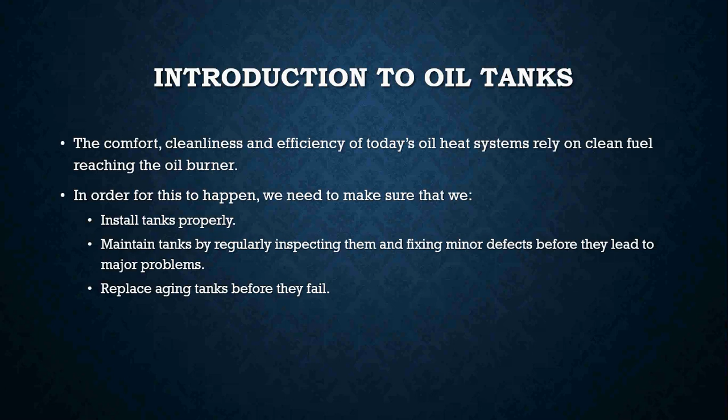We should be definitely looking at the overall condition of the tanks, and obviously we're going to want to replace them if they are old, and usually with well-maintained tanks, they'll last probably longer than the furnace and burner itself. It just all depends on where they're located and the overall maintenance that's been done with them.

Okay, when we are installing tanks, though, we really need to make sure that we follow code. Different towns and cities have their own codes that need to be followed, but they cannot be any less than the International Code Council or NFPA. So we have to always make sure that we're following the set standards and codes for that particular part of the country, state, wherever it is that you are.

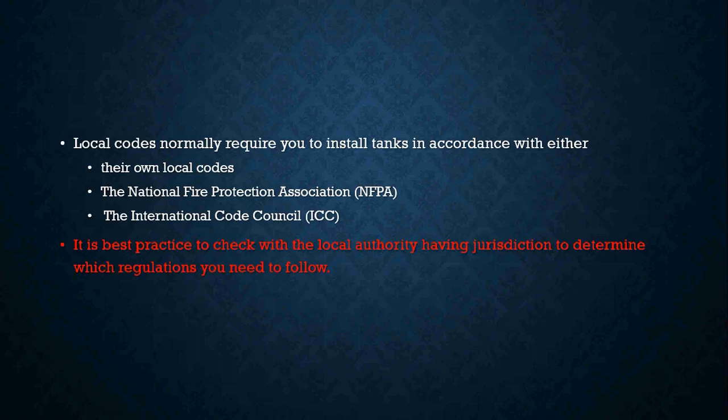So it's always really important to check with your local authorities having jurisdiction to determine which regulations that you actually need to follow to properly install an oil tank.

So why do oil tanks really fail? That's always a good question. In fact, some people will maybe even ask you that question. Well, what the heck, why does my oil tank need to be replaced, or why has it failed? Well, the big reason is because of corrosion. Corrosion is a big part of how an oil tank is going to fail.

You have external corrosion, and that is usually caused by electrical activity that occurs between two different parts of the tank, and that's usually between the tank and its piping or between the tank and other metals that are in the area. Okay, so usually the overall area of the tank is what's going to cause that external corrosion. The tank and the piping, well, we deal with copper oil lines and steel tanks. So with those two dissimilar metals, over time, you can start developing external corrosion and possible leaks. If the oil tank is in contact with another dissimilar metal, again, it can create some sort of external corrosion.

Now, does that happen overnight? No, I mean, it could literally take years before this type of corrosion can take place. So for external corrosion to occur, there needs to be an anode, or something that is giving up electrons, okay, such as the tank. You have a cathode, which we use to accept the electrical flow, and that's going to be your piping or metals in the ground or whatever it is that's there. And then you'll have an electrolyte, which is something for the electricity to travel through.

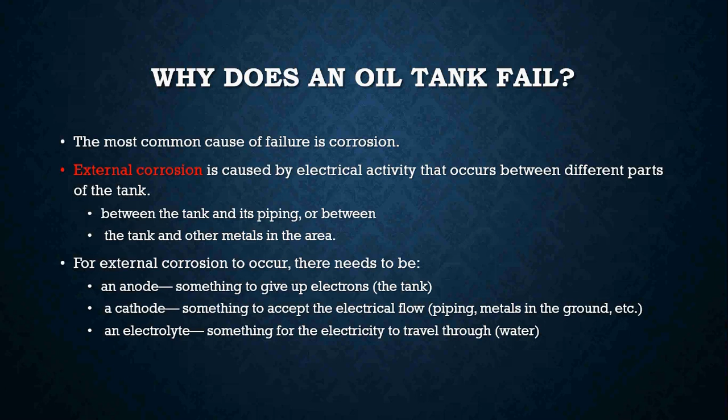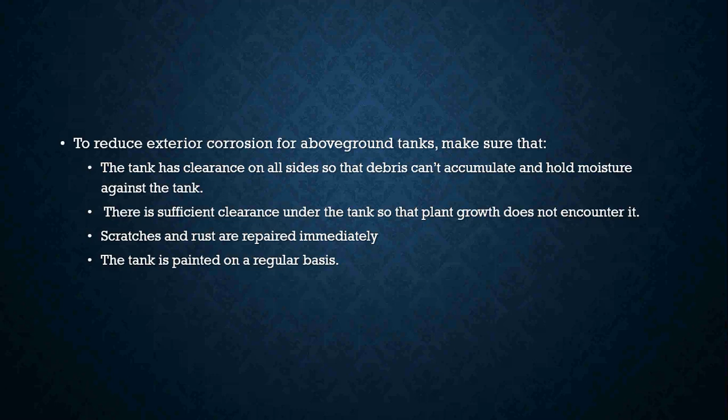And that is usually going to be water. To reduce that external corrosion, especially for above ground tanks, we have to make sure that the tank has clearance on all sides so that debris can't accumulate and hold moisture against the tank. We have to make sure that there is sufficient clearance under the tank so that plant growth does not encounter it. We also have to make sure that any scratches or rust marks are repaired immediately, and make sure that the tank is painted on a regular basis.

So internal corrosion is another way that a tank can deteriorate, and that is usually caused by sludge produced by bacteria. Okay, for internal corrosion to occur, you need to have water and bacteria on the bottom of the tank. So that bacteria, which lives at that oil and water line, which is usually right around here, okay, it's going to develop bacteria. That bacteria is going to develop into sludge, and that's going to settle at the bottom of the tank. And that is what's going to eat the oil and create a substance that, when mixed with water, creates an acid. And that's going to actually corrode the metal of the tank.

So when we are dealing with oil tanks, whether they're in ground or above ground, it is really good practice to actually dip the tank, where you take a measuring stick and put a special water-finding paste on that stick, and dip the tank. If there's any water accumulation at the bottom of the tank, that paste is going to change color, and we can measure how much water is in the tank.

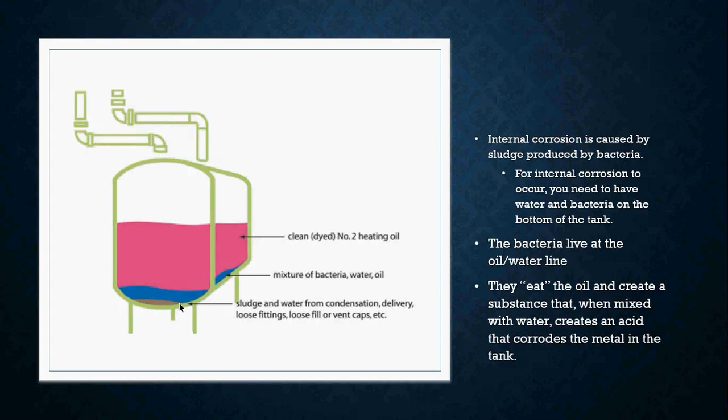We want to always try to keep water in the tank to a minimum. We don't really want too much of it in there because it's going to pollute. The best way to prevent internal corrosion is to eliminate the water at the bottom of the tank. You must also determine how the water got into the tank and take corrective steps to prevent water from building up again.

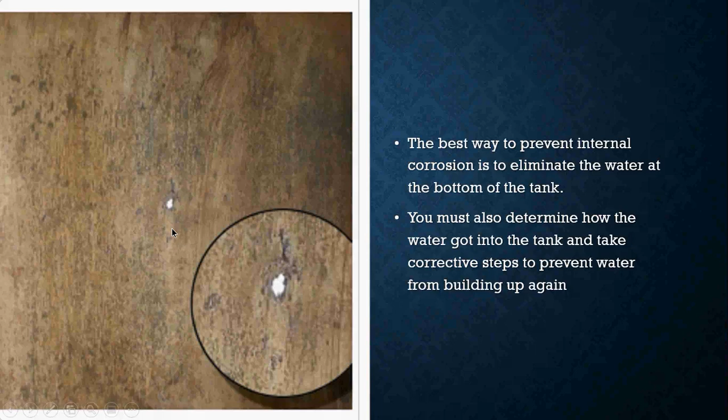So what you're seeing here are actually signs of corrosion on the side of an oil tank, these little white blotches. When you're looking at the external part of a tank, you're going to want to investigate to see if you have any signs of stuff like this.

You're also going to want to look and see if you have what we call bug tracks. These are signs of bacteria eating its way through an oil tank. If you see something like this, this tank needs to be replaced relatively fast, because these are actual weak spots in the metal, and eventually that tank will rupture, and you're going to have a really big catastrophe in that basement or wherever the oil tank is located.

The common causes for water to get into a tank are condensation, broken tank gauges, especially if you have outdoor tanks, and loose or missing fill and vent caps on your outdoor pipes.

Some people like to take old sauce cans or soup cans and stick them over the pipes. Sometimes you're going to want to look underneath those cans, if they are there, to see whether or not the fill and vent caps are actually there.

Another cause is pumping oil from an old tank into a new tank. Remember, oil that's been sitting in a tank for a while is going to have impurities in it. So simply pumping it from an old tank to a new tank, you're going to put water in the new tank. Another cause is failing to drain the water from a tank before installation.

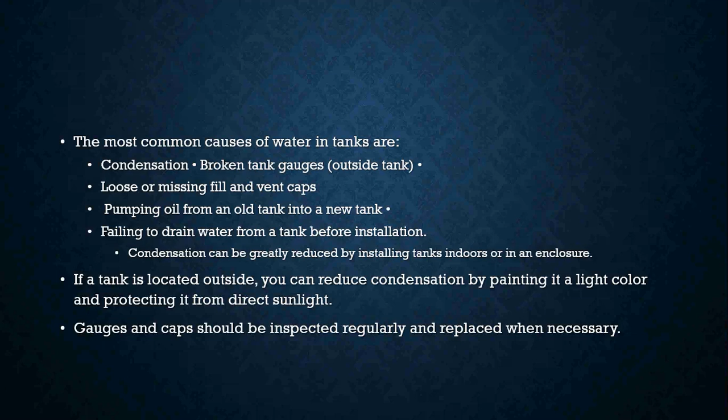Gauges and caps should always be inspected regularly and replaced when necessary. So when installing a tank, you've got to really make sure you know what you're doing from the first part.

You have to take into consideration the following questions: What size tank do we need to best suit the application we're dealing with? What's the best place to install it? Is it going to be in a basement, or outdoors? And if it's going to be outdoors, where can I put it so it may not be in direct sunlight 24 hours a day? What type of tank is going to be best to take care of the heating needs of the home?

When it comes to sizing, an oversized tank can cause service problems, such as poor fuel quality. Fuel oil has a shelf life and deteriorates over time, leading to corrosion. Large tanks usually build up more water from condensation. The bigger the tank, the more surface area you've got, and the more surface area, the greater the chance of developing corrosion.

So in general, the right size tank is one that holds roughly about a third of the customer's annual consumption. For example, if we have a customer that uses roughly 900 gallons of oil a year, a 275 or 330 gallon oil tank would be sufficient for that type of application.

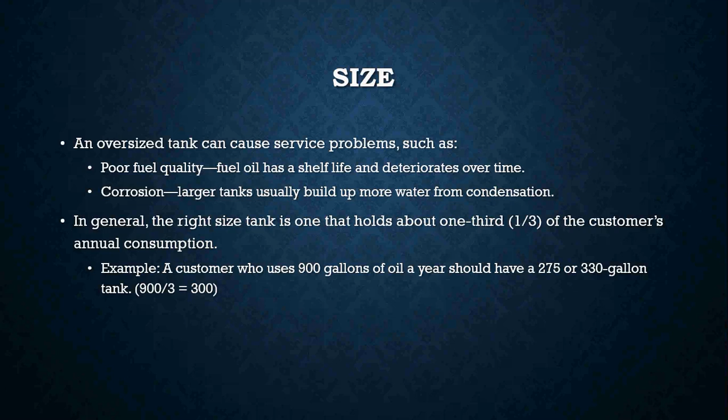How do we get to that number? Well, we take 900 and divide it by 3, which is 1/3, and that comes up to about 300 gallons. So roughly a 275 or a 330 gallon tank would be sufficient for that particular home or business or whatever it is that we're dealing with.

The location of your tank is also really, really important. Where is it going to be? Is it inside a building? Like I said, usually a basement, maybe a utility room, in a garage, wherever it's going to be. If it's going to be outdoors, is it going to be above ground or underground?

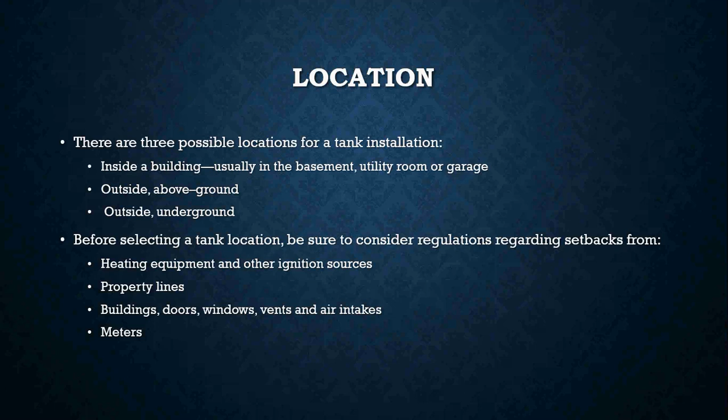Before selecting a tank, be sure to consider regulations regarding the setbacks for those tanks. How far away does the oil tank need to be from heating equipment or an ignition source? How far away does it need to be if it's outside from a property line, from other buildings, doors, windows? We have to make sure we're following those local codes. Any sort of meters that may be around, say maybe there might be a gas meter in a condo complex or something like that - where does that oil tank need to be?

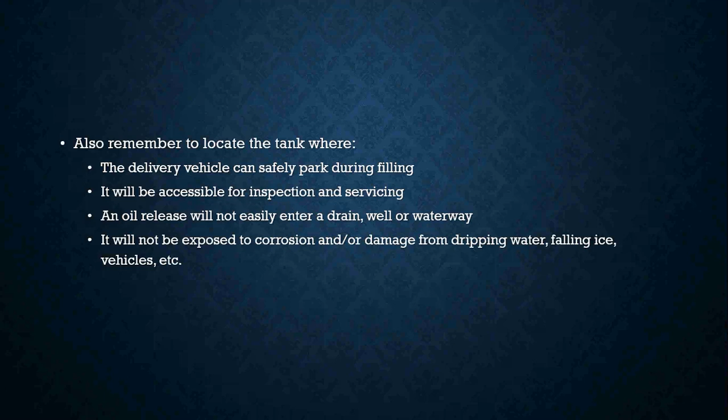Also remember to locate the tank where the delivery vehicle can safely park during filling. We want to make sure the oil delivery guy has a good line of sight for his truck to where he's filling. It will be accessible for inspection and servicing. Any oil release will not easily enter a drain, well, or waterway - those are also really important things to look at when picking a tank location. Also, will it not be exposed to corrosion or damage from dripping water, falling ice, vehicles, whatever. Inside tanks, above ground tanks, indoor tanks should be installed whenever possible.

In fact, I think inside tanks is really probably the best way to go, if at all possible. These installations offer a number of advantages over outside tanks, including that the oil is usually warmer, which helps with viscosity issues, because when you're dealing with oil that is warmer, it's going to flow better, and it won't gel or have cold weather performance problems. There are fewer temperature changes, which means the oil will last longer, because remember, it does have a shelf life. So if oil is at a more relative temperature and doesn't have a massive fluctuation, it's going to last longer and you'll have fewer problems with it.

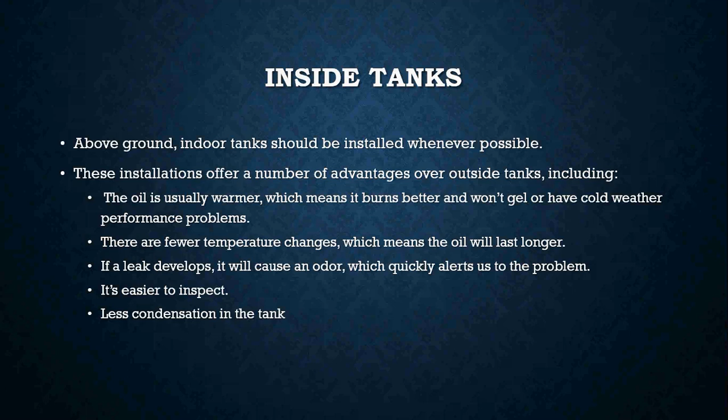If a leak does develop, it can cause an odor, which quickly alerts us to a problem. If it's underground, we don't necessarily find that problem until it's too late. It's easier to inspect because it's visible, and you have less condensation in the tank - again, because it's at a relatively constant temperature.

It's also important to follow codes and instructions regarding tanks that are indoors. Distance from the tank to a burner - they have to be at least 5 feet away from the burner. Your size and height of vent pipes is also important - you have to follow your local code for the minimum size for your vent and your fill. Your size for fill pipes, fusible valves at the tank, fusible valves at the burner.

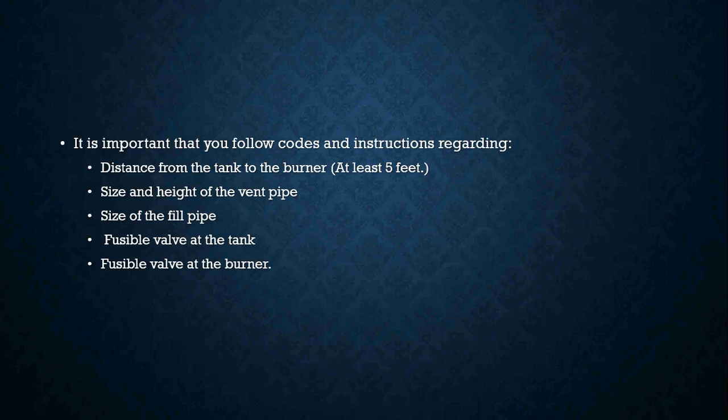You have to make sure all these components are there when installing an oil tank. We have to have some way to shut the oil off in the event of an emergency, and obviously when servicing. The fill and vent lines must be pitched towards the tank. All tanks should have a vent alarm and a tank gauge. All systems should have an oil filter, which can be located at the tank, at the burner, or at both.

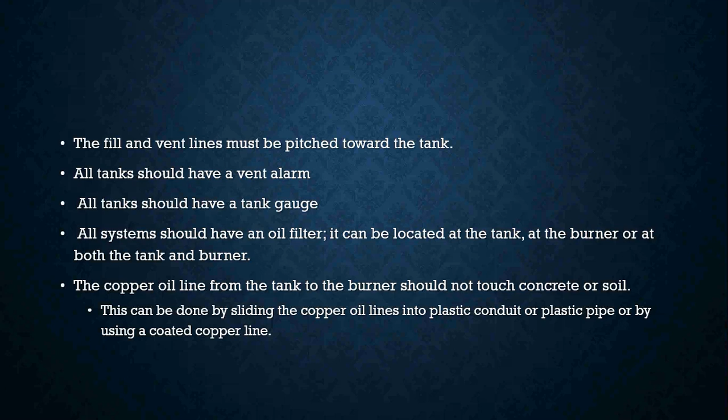The copper oil line from the tank to the burner should not touch concrete or soil, and this can be done by sliding the copper oil line into plastic conduit or pipe, or by using a coated copper line. So if you're dealing with tanks or oil lines that are going to be underground, it's good practice before they pour the concrete over it, that the oil line gets installed in a conduit or plastic tubing, so it does not come in contact with any foreign matter.

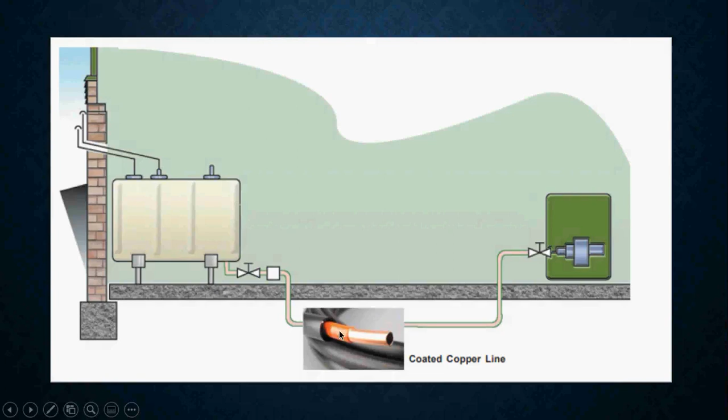Obviously, older homes didn't do this. If you go into a basement now, you could probably see that the oil line just kind of sticks into that concrete - that's just the way things were done back in the day. But newer installations, we now put them in a plastic sleeve or some protective enclosure when going through the ground. Or what we simply do is take those oil lines, abandon them, cut them at the floor, and run a brand new oil line along the floor using that nice protective coated copper oil line, so it doesn't corrode when it touches the concrete.

Outside oil tanks, above ground tanks that are outside, if there is no room for a tank inside the building, it must be installed outside. So it's a good idea to install the tank in a secondary containment type system, or in an enclosure that protects it from the elements.

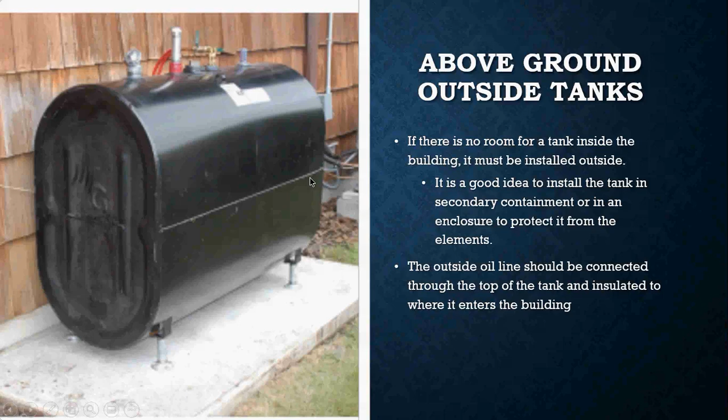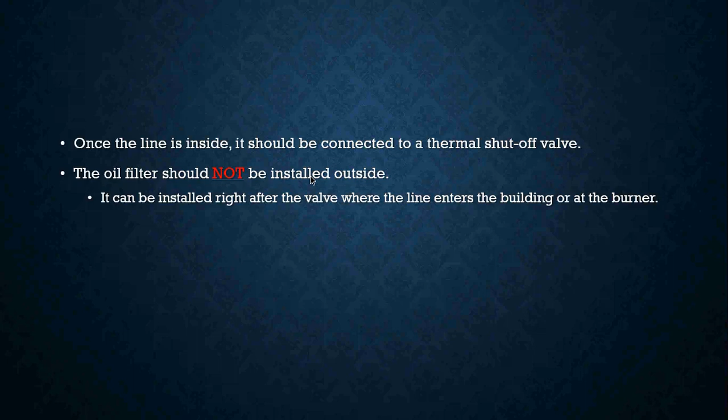Once the line is inside, then it should be connected to a thermal shut-off valve, such as a Firomatic valve. And the oil filter should not be installed outside. It can be installed right after the valve where the line enters the building or at the burner.

For underground tanks, they do have an environmental issue, especially if they start to corrode and break down and crack. All that oil that is inside the tank is now going to seep into the soil, and that creates environmental problems, environmental regulations, and insurance concerns. So underground tanks need to definitely be inspected a lot more frequently. And if there's any signs of deterioration, they should be removed from the ground, and that tank should be replaced to either an indoor area or above ground, as we were just previously mentioning.

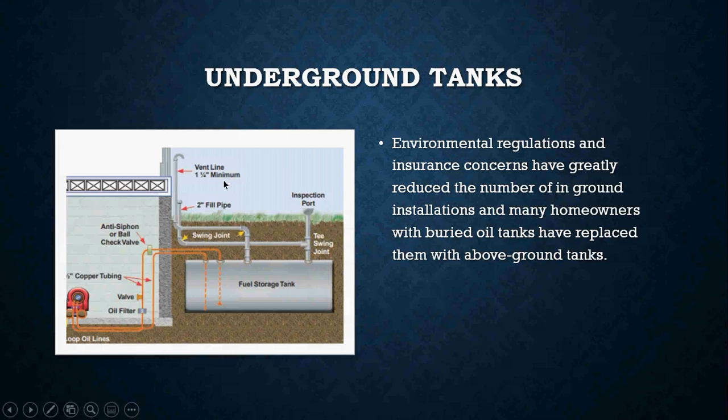When it comes to your vent and fill lines, we need to have a minimum of 1.25 inches for our vent lines and a minimum of 2 inches for our fills.

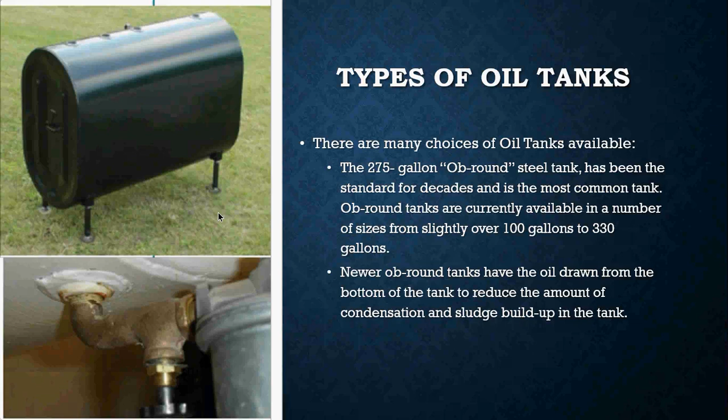Your types of oil tanks that are around, there's a whole bunch of them. The most common one is our 275-gallon ob-round steel tank, and these have been pretty much the standard for decades, and is the most common type of tank that we have. These types of tanks are currently available in a number of sizes, anywhere from 100 gallons to about 330 gallons. Newer ob-round tanks have the oil drawn from the bottom of the tank to reduce the amount of condensation and sludge that's built up in the tank.

You have your cylindrical types of tanks. These tanks are often found in mobile homes and in places where space considerations made it easier to install and service than having an ob-round tank. These types of tanks can range anywhere between 160 and 320 gallons.

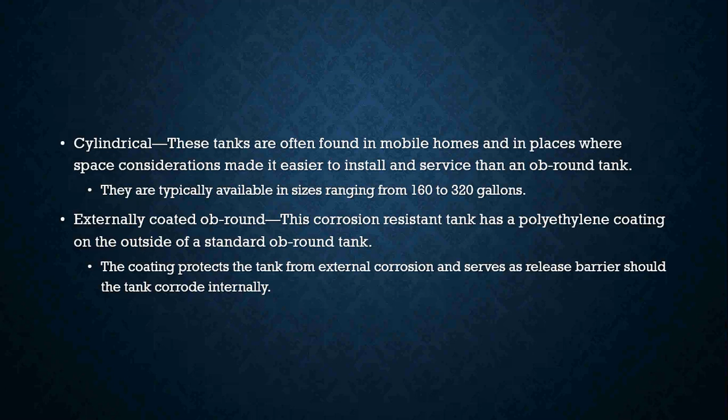You have your externally coated ob-round tanks. These are corrosion resistant tanks and have a polyethylene coating on the outside of a standard ob-round tank. The coating protects the tank from external corrosion and serves as a release barrier should the tank corrode internally.

You also have your fiberglass tanks. This corrosion-proof tank is available in both single and double wall models and can be anywhere between 240 and 300 gallons. The double wall unit is a tank within a tank. If the inner tank leaks, the outer tank prevents the release of the oil.

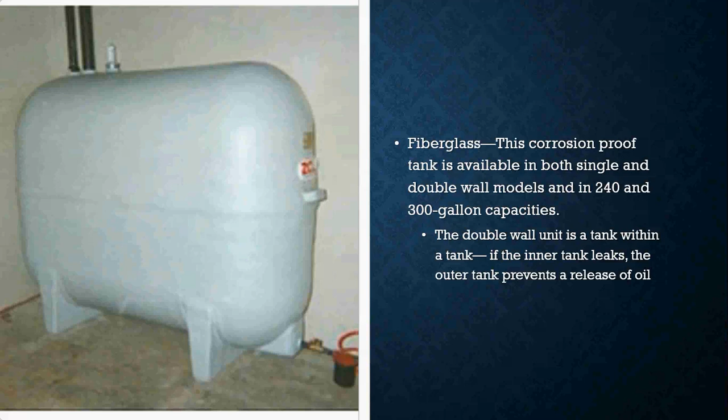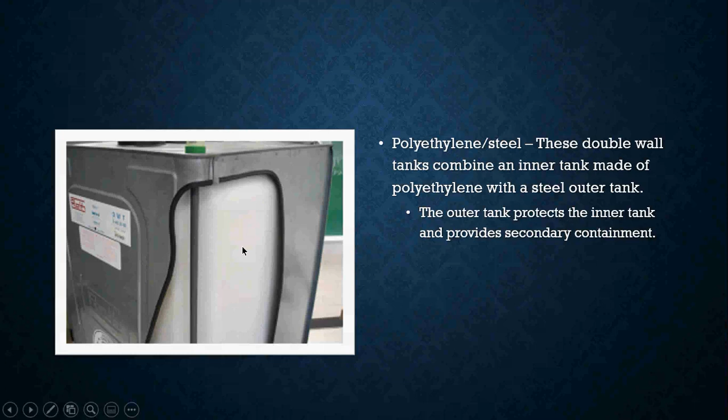You could also have your polyethylene steel tanks, or better known as your Roth tanks. These are also double wall tanks, and they combine an inner tank made of polyethylene with a steel outer tank. The outer tank protects the inner tank and provides secondary containment in the event that the plastic actually cracks.

Your underground tanks can also be your steel or STI-P3s. These tanks combine the strength of steel with a factory installed corrosion protection system. These types of tanks have a protective coating over the steel that prevents external corrosion. It has a sacrificial anode that protects the steel. It also has nylon insulation bushings that electrically isolate the tank from the pipe fill, vent pipe, oil lines, and the other attached piping.

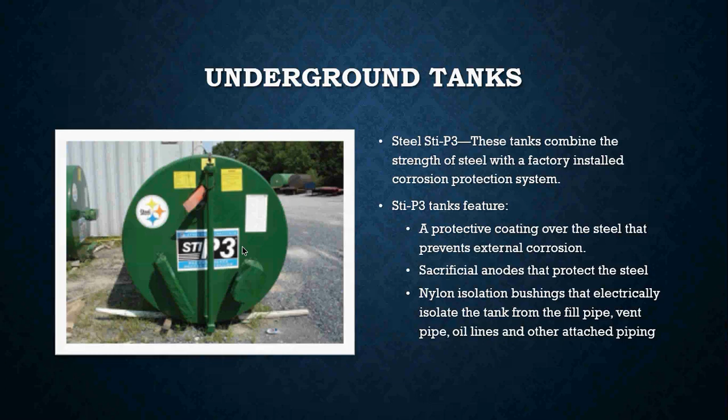Your ACT-100s and ACT-100Us, these tanks include a much thicker protective coating and offer protection just like the STI-P3s, but they don't have the sacrificial anodes. Your fiberglass, better known as your fiberglass reinforced plastic tanks, they never rust because they are made of corrosion resistant material.

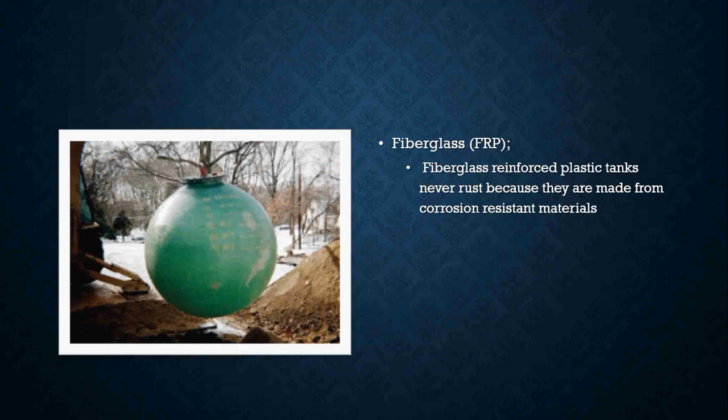When we are installing any one of these tanks, we need to make sure that we are following the manufacturer's installation instructions and all of our applicable codes and regulations during the installation process. Always work neat and protect the customer's property and equipment that you are installing. Which means you better have your eyes open, your ears, and be paying attention to everything that is going on around you when you are putting these things in.

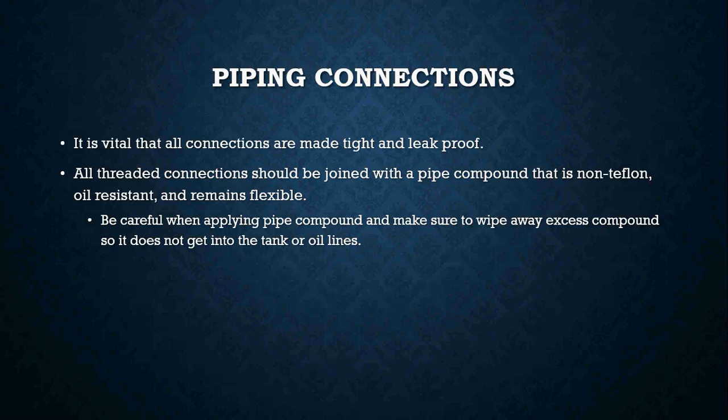Piping connections - it is vital that all of your connections are tight and leak-proof. All threaded connections should be joined with a pipe compound that is non-Teflon, oil-resistant, and remains flexible. Be careful when applying pipe dope compound, and make sure to wipe away excess compound so it does not get into the tank and your oil lines, because that can create problems and possibly plug your oil lines if you use too much.

Your fill and vent pipes should be made of Schedule 40 steel. The pipes should be pitched toward the tank and terminate outside the building at a point at least 2 feet from any building opening, such as doors and windows, and 5 feet from any air inlet or flue gas outlet. All steel fittings should be malleable and not cast. The fill pipe should be clearly marked as the oil fill pipe.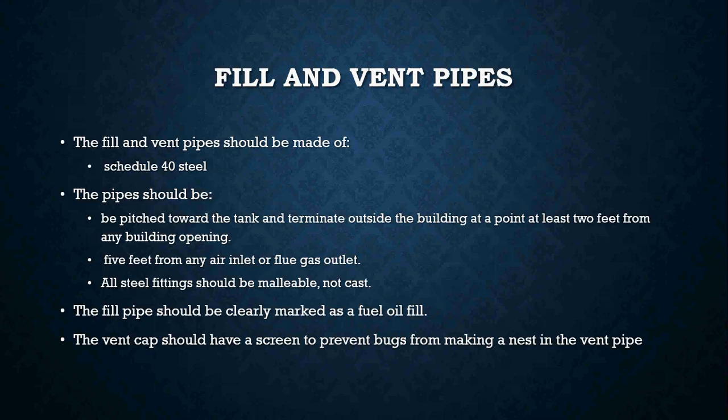Your vent alarm - for all above ground and indoor tanks, there should have a vent alarm installed. The vent alarm alerts the delivery person that the tank is filled to the proper level. Vent alarms are not always required for residential buried tanks because they have special filling devices such as a vent-a fils, bazooka, or deep fill type device that includes a vent alarm that may be used.

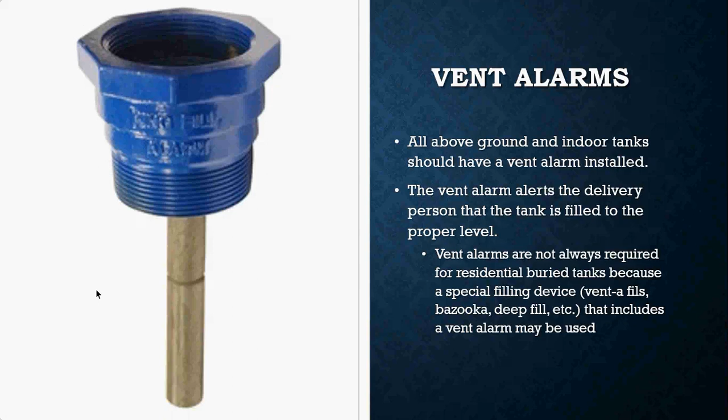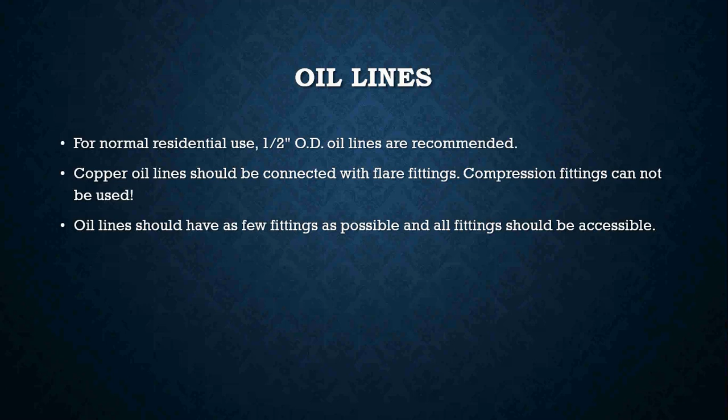Oil lines for normal residential use are 1/2-inch OD oil lines - those are usually what's recommended. Your copper oil line should be connected with flare fittings. You should not, under any circumstances, use compression fittings. Oil lines should have as few fittings as possible, and all fittings should be accessible, meaning we should never be running oil lines through a wall. If running an oil line, it needs to be as one piece as possible with very little fittings used.

Your thermal shutoffs, better known as Firomatic valves, are installed on the suction line or supply line from the tank. Your outside tank should have a shutoff valve where the suction line enters the building, and an oil filter should be installed in your suction line.

The way a Firomatic valve works - on the interior side, right where I'm circling, you have your little threaded stem here. This internal portion is actually like a piece of solder or material that is going to melt in the event of a fire or the valve overheating for whatever reason. When that happens, it's going to allow the valve to jam closed.

Inside the valve itself is a spring, so when we tighten and open the valve, we are actually pushing or pulling the valve open. So when the solder happens to melt or break, this stem jams downward and will close the valve, shutting off the oil flow to the burner.

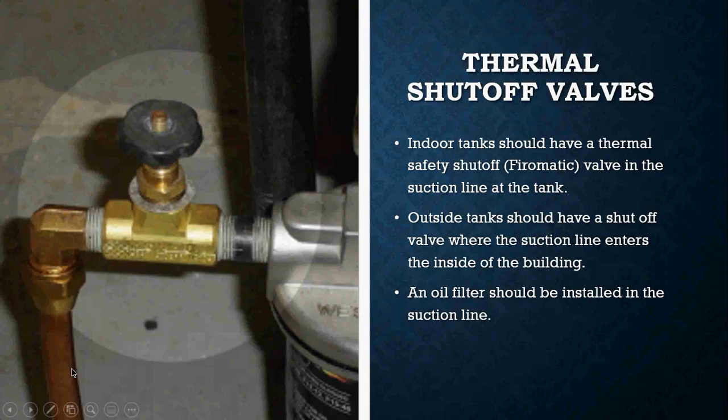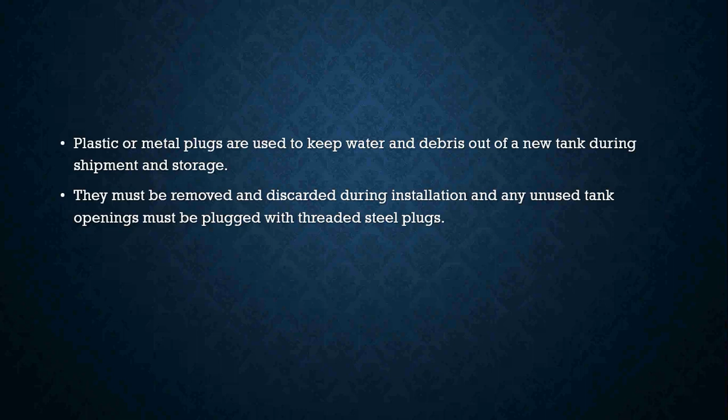Plastic or metal plugs are used to keep water and debris out of any new tank during shipping and storage, and they must be removed and discarded during installation. Any unused tank openings must be plugged with threaded steel plugs.

Oil tank inspection is one of the really important parts of any service and maintenance of an oil burner or oil piece of equipment. It should be done on a regular basis so potential problems can be discovered and corrected in a timely fashion. This is ultimately done in 3 levels of tank inspection per NORA standards. NORA stands for the National Oilheat Research Alliance, and they basically come up with all of our standards in the oil industry.

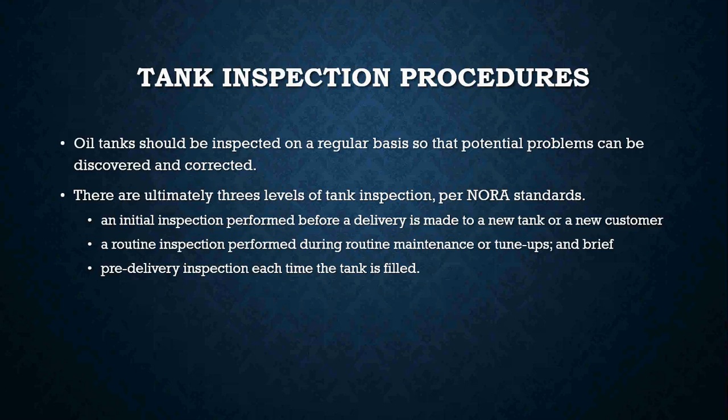So the 3 levels of inspection are: your initial inspection, performed before a delivery is made to a new tank or new customer, just to make sure it's in good condition and was installed correctly. Then your routine inspections, performed during routine maintenance and tune-ups. And then your pre-delivery inspection, done pretty much every time the tank is actually filled.

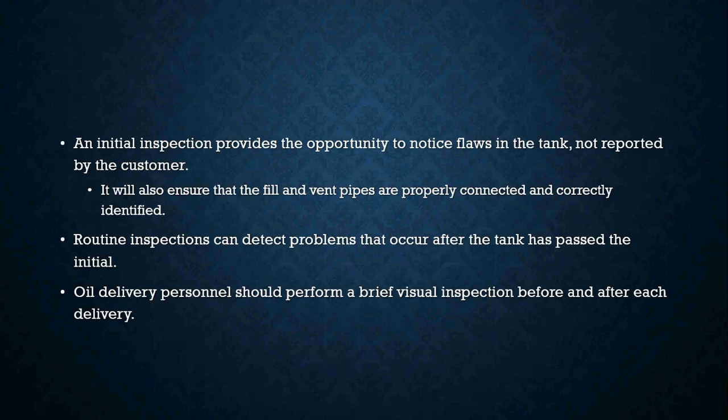An initial inspection provides the opportunity to notice flaws in the tank not reported by the customer. It will also ensure that the fill and vent pipes are properly connected and correctly identified. Your routine inspection can detect problems that occur after the tank has passed the initial inspection. And your oil delivery personnel should be performing a brief visual inspection before and after each delivery.